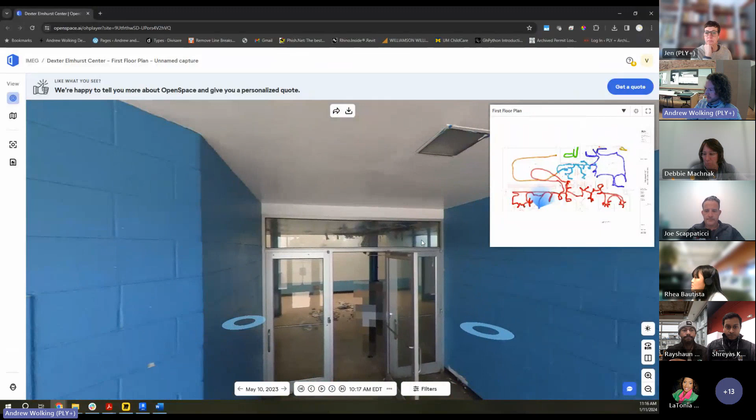If we move into the building, there's this entry space here, and then jumping into this main corridor. So we're looking now towards Tuxedo Street.

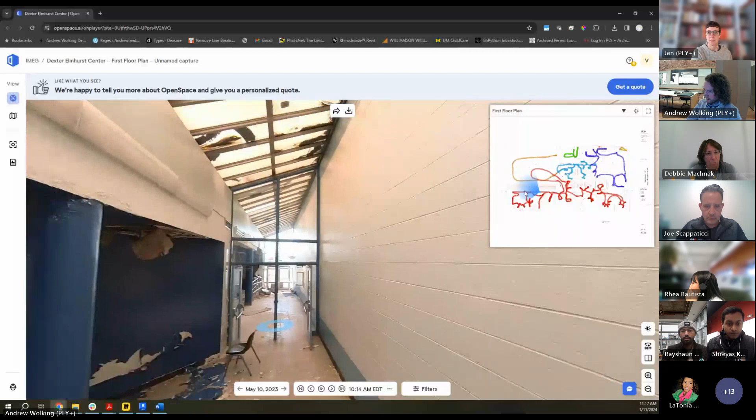There's this glass clerestory right now that's in pretty rough shape, with a lot of water damage from leaking over time.

This is that back admin space. There's a restroom located back here as well.

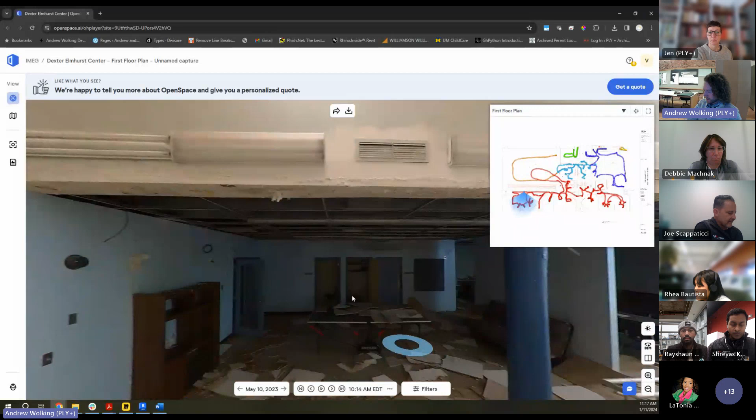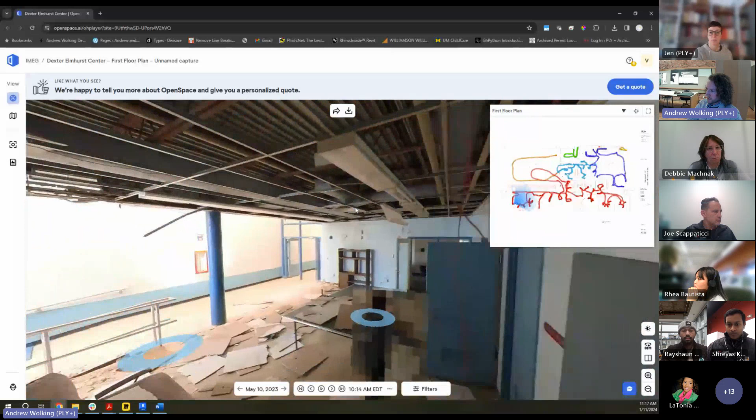A lot of the ceiling tiles have been removed up to this point, so we are able to see more of the existing structure than we currently can in this virtual walkthrough.

I'm going to jump back to the corridor here and work our way towards Elmhurst Street.

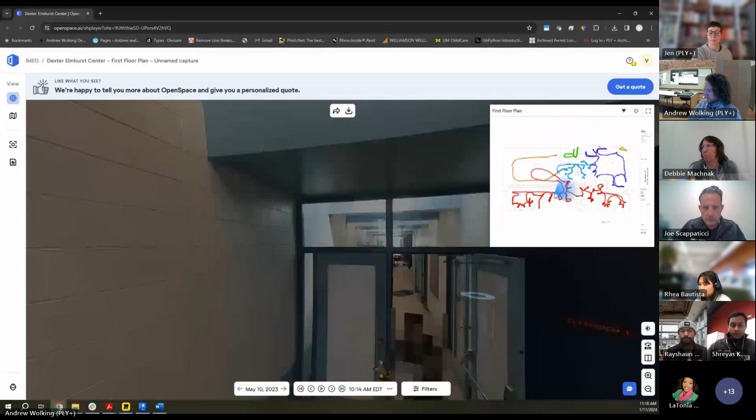These box outs are for the existing bar joists that span across the corridor.

I'm not going to go into these little side rooms here. There's really not much to see internally, and it's also quite dark on the inside there.

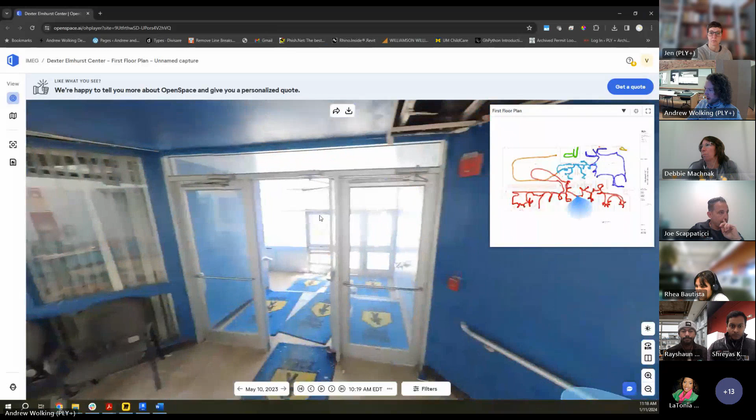So this is that second entrance off of Dexter. In our new plan, we're actually proposing to convert this into essentially a reading room and block this entrance off with a new storefront window.

There's 2 existing bathrooms right off of this main corridor here.

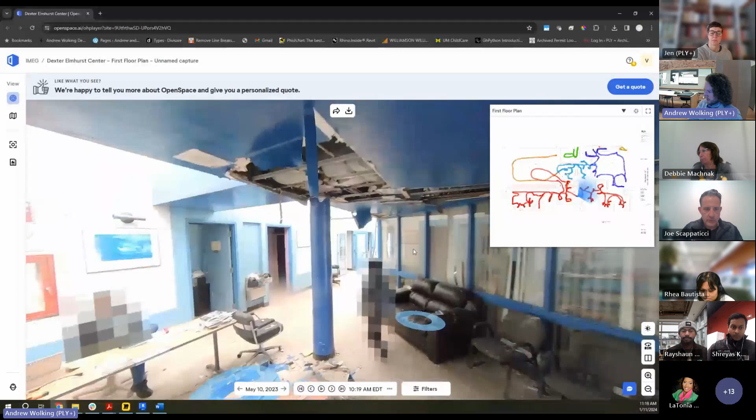Making our way towards Elmhurst Street, that other entranceway, you can see the water damage over time from the building.

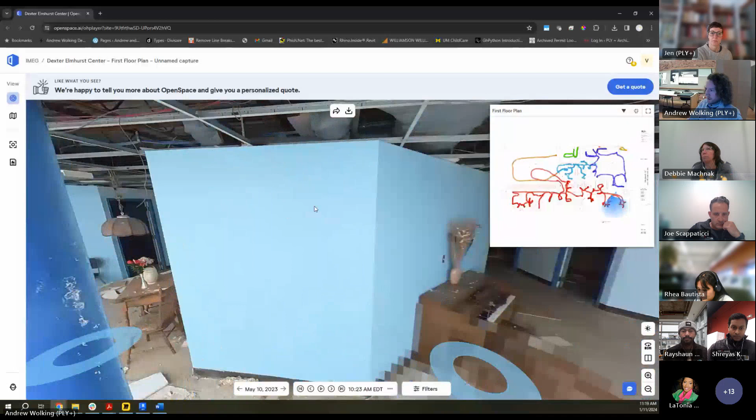Working my way into the community room here. Up in this little key plan, this purple area, it's a little dark in here. We didn't have power at the time, and there is no power at the building currently.

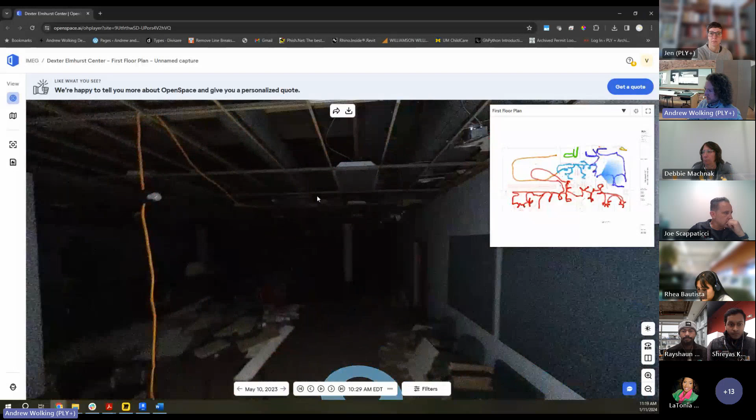Again, a lot of this ceiling grid has been removed. You can definitely access a little bit more of it right now if we were there, but this does give you an idea. There's an existing wood deck here.

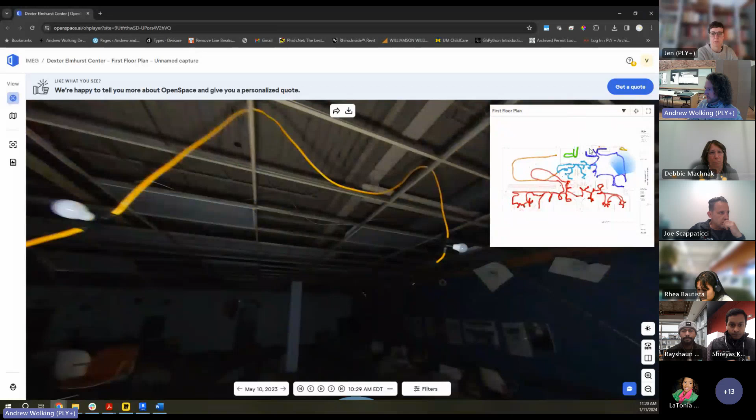This is currently an existing kitchen on the back side here, and then the fire suppression system has this corner room that's back in this yellow area here.

There's a central corridor that connects the community room to the gym. One of the driving factors for a lot of the renovation work is accessibility.

There's a lot of different levels within the building that we needed to navigate in order to simplify accessibility and access to the main restrooms in the center portion of the building, as well as that connection between the gym and the community room, which we'll take a look at when we look at the new floor plan.

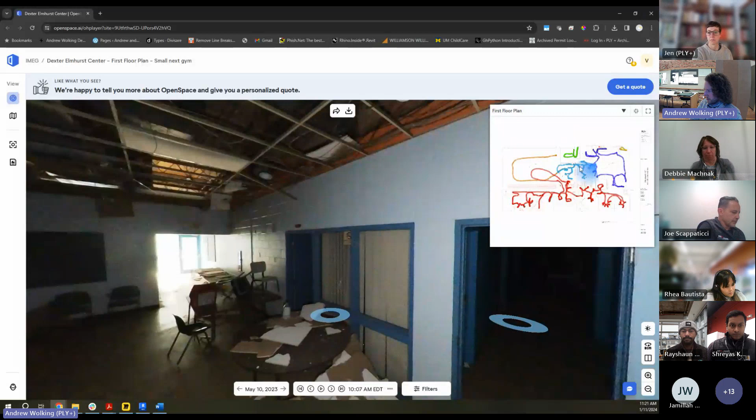This is a ramp that ascends up, levels out, and then goes back down to get to the gym.

Kind of be up in the ceiling space, bear with me here. And then we're going to make our way through to the gym.

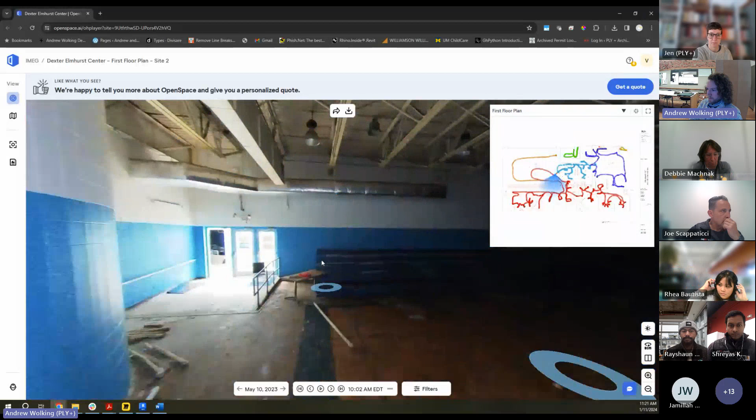It's a little bit dark here, so I might jump to some actual photos that we took early on. All the structure is in really good shape in the gym, it's more the finishes, etc., that need to be updated within this space here.

I'll jump to some existing photos of that gym when we did have power in the building, just to give you guys a better sense of what that space is like.

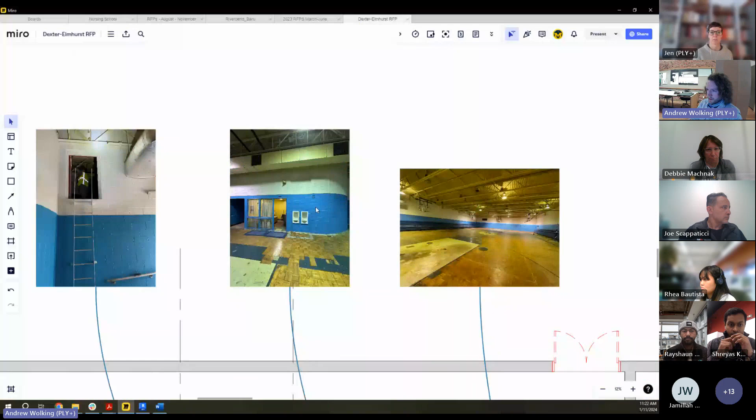This is looking towards another admin office. Off of that, there is an existing storage room, which if I go to the plan here, that's above the restrooms right now, that we are going to maintain.

We'll flip back to the virtual here.

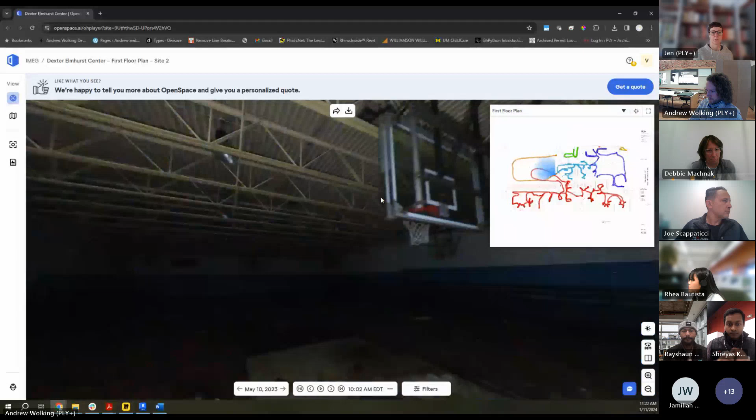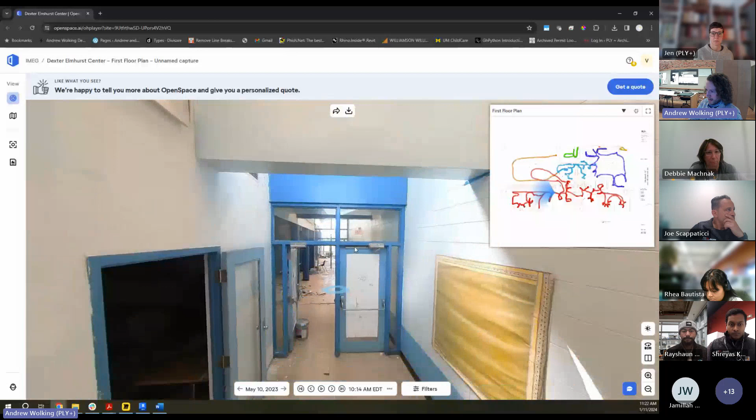And then jumping kind of back out. Whoops, there's the jump. Get back to the corridor here. So I feel like that gives you a sense of at least a little bit of where things are at right now with the existing conditions.

With that, I might jump to the main, new floor plan, and just walk through that real fast here.

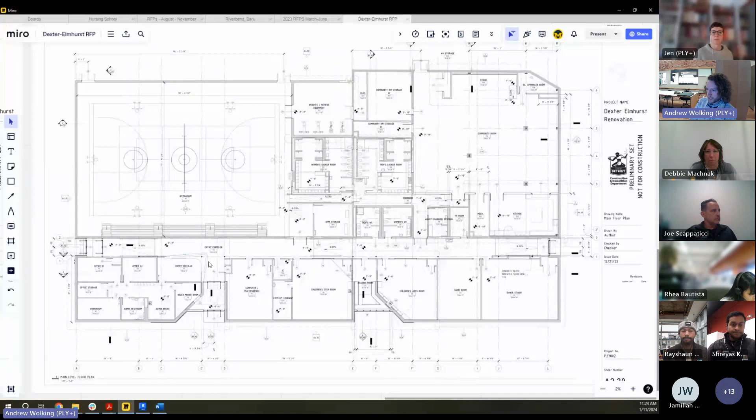In terms of circulation, we're going to come up a ramp. There's a main central check-in desk. Same thing off of Dexter. So anyone entering the building has to pass through this area first.

The exit off of Elmhurst is exactly that, it's going to be for egress only. And that goes the same for doors off of the gym back here, for egress, and then off of the community room as well. So the two main entrances, again, here and here for the main building.

That central portion of the building programmatically remains relatively the same. We're just reconfiguring the spaces so that we can have better access in terms of ADA accessibility and navigating those different floor levels.

So as you come up the main corridor here, you can tuck left to the gym, and there's a little ramp that takes you down because there is a floor level change between the gym and the main corridor.

Off of the gym here, we have an open weight room, and then an existing electrical room is going to remain just that, an electrical room, but with upgraded equipment as well.

That main connecting corridor that we had passing through this area, we're shifting plan south here, so there's a ramp that takes you up, and that allows a unification of this level to access the two locker rooms. This is labeled in the drawings as level 2 here.

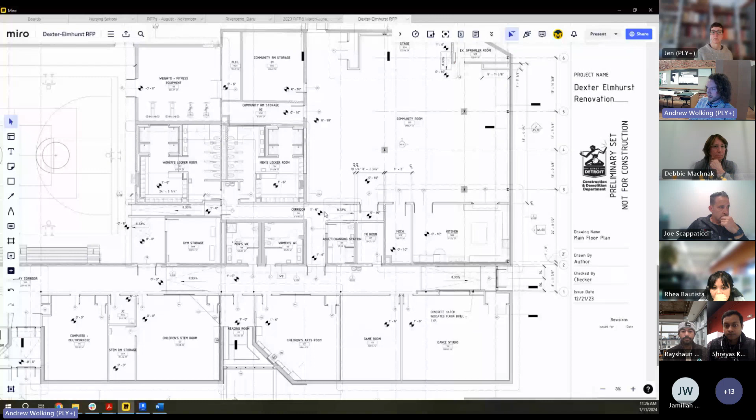To the right of that, we have an adult changing station, a larger room for accessibility, and then there's a level change again as we get into the community room, so another ramp that takes us down to this level here, and again, this was that existing building, along this grid line here.

Plan south, we've relocated that kitchen that was tucked along this back area. The rec center was interested in a larger kitchen, a community kitchen that allows the rec center to support community food programs, as well as maybe a teaching kitchen as well. So we enlarged that area, and that's right off of the community room as well.

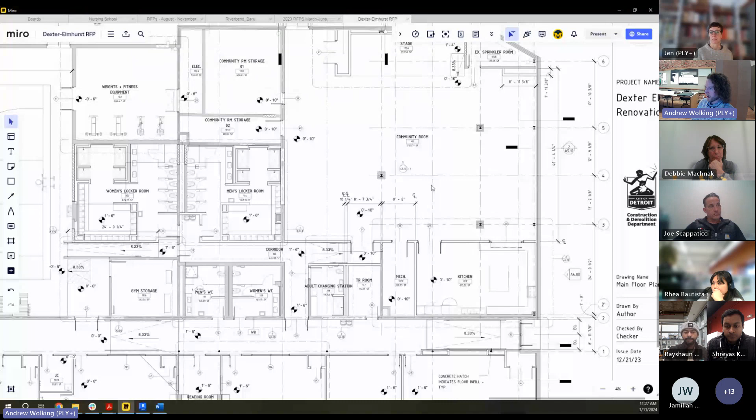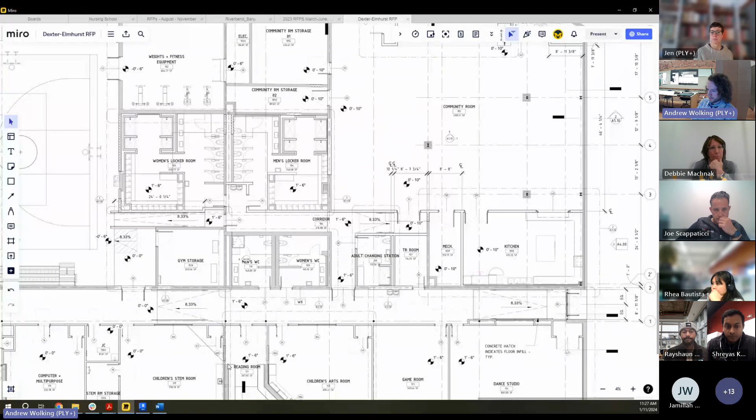And I think that covers everything from the main floor plan. In terms of the exterior of the building, we can go to a few photos of that on the outside.

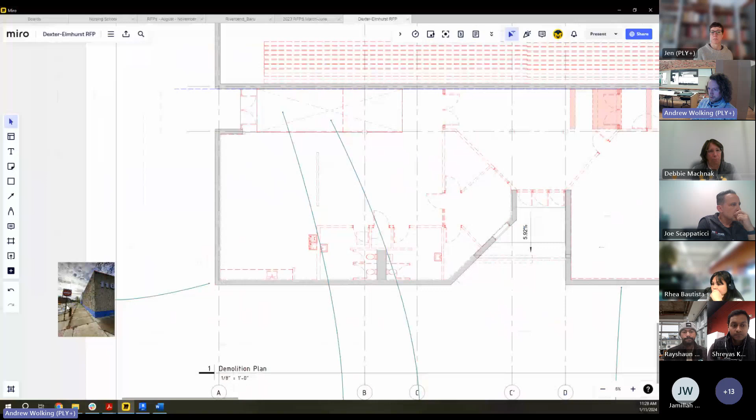We're updating finishes where we need to, but the exterior of the building is going to be essentially painted everywhere, and there are some areas that need masonry repair, as well as some tuck pointing, especially along this back wall off of the parking area, where this was the original building as well.

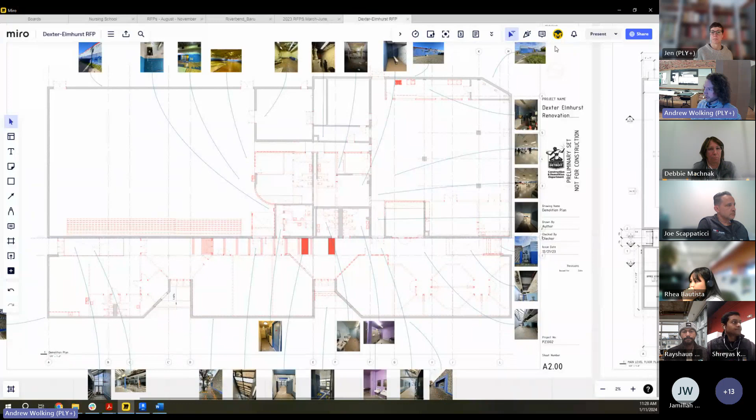So a couple of images of that. You can kind of see this has actually been removed. There was definitely some moisture issues on this wall, and a lot of the vegetation has been removed, but there's definitely some repair work needed along here.

This is kind of the dividing line between the existing building and the gym portion, which changes to CMU block on that side. We have a closer up view of that as well.

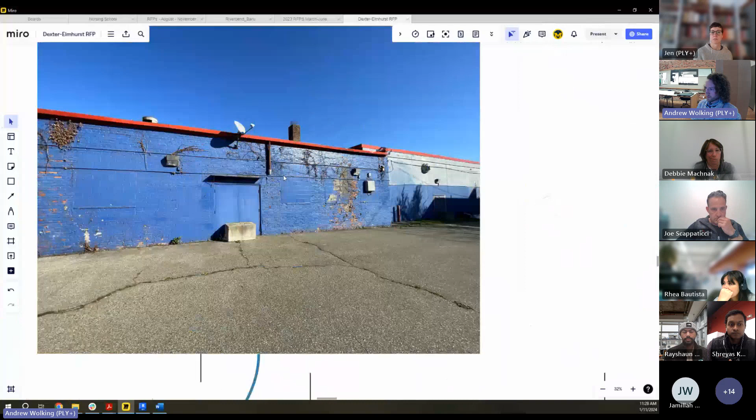And then in terms of the frontage off of Dexter Street, it's a fluted block construction, and then these little entryways that are tucked in here switch to just regular CMU.

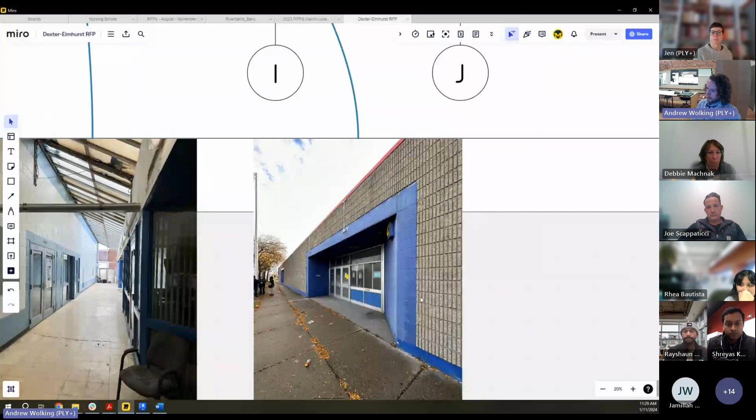We are proposing some new perforated metal screens to help us screen the RTU units that are going to be servicing the admin area, but also to give a little bit of identity to that frontage along Dexter Street, to bring the building some color as well as identity.

I think that covers it. Debbie, anything else I should touch on that I might have missed?

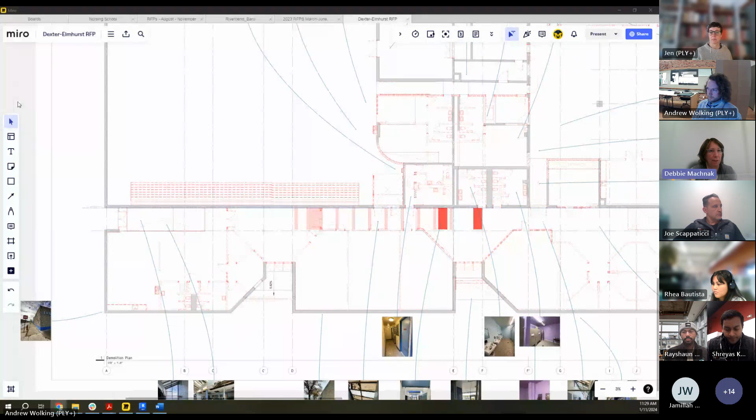No, I think you did pretty good with the inside of the building. I just want to make it very clear to everyone bidding on this: there's quite a bit of electrical work inside there, and there will be mechanical work for the rooftops. And one thing - there is some work in the basement, and it is showing on the demo plan, but that's part of the demolition, which is also part of this contract.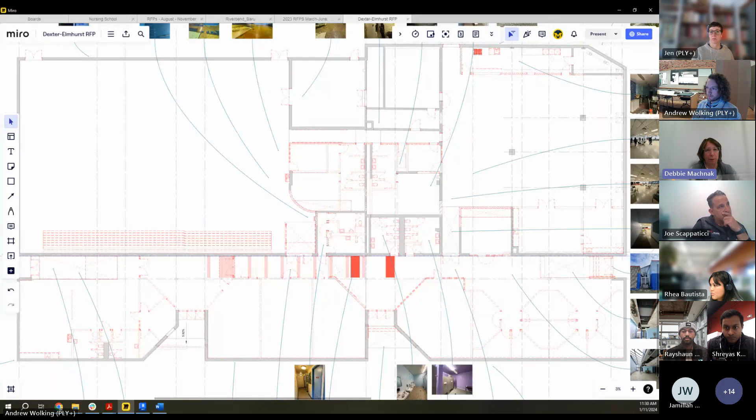So for that, thank you, Andrew. Again, I appreciate you running through that. The building is definitely - we're not walking it because there's been rain leaks and so forth in there. We do want to have the selective demo be part of the first process of the building, so it's something we'll be looking at with the bid and how I plan to get that work done.

That will take place. There will be no power to the building - there is currently no power. So you'll have to obtain and get some temporary power over to the building.

So, Rayshaun, would you like to show some of the park and the plaza area? Yes, okay, I want to share my screen. Can you guys see my screen? Or Deb, can you see my screen?

So a portion of this project will be the plaza and the park. So here we have the plaza, which will be a portion of Tuxedo closure, which is adjacent to the rec center that's going to be renovated, and then this larger parcel here, which will be the park.

So going back here to where the plaza will be, we're coordinating with Detroit Public Works to do the removal of Tuxedo, to bring it up to grade, and then we can start our construction for the plaza. So DPW will be coordinating that with us.

In regards to the park parcel, as you can see, the majority of the parcel is asphalt. I think it once was a parking lot, but you do have some amenities, which you can see here - there are some basketball courts here.

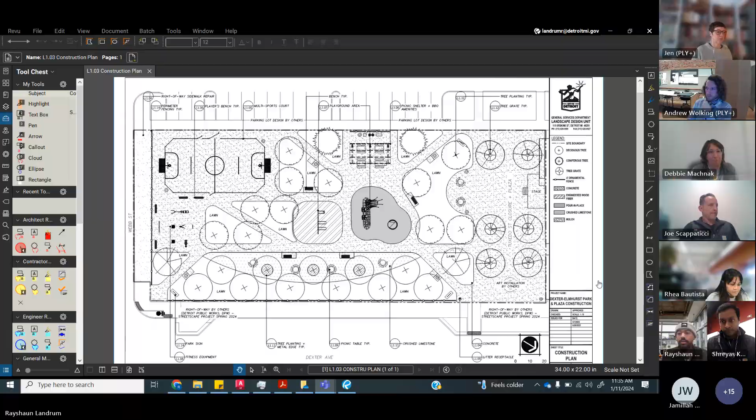Okay, can you guys see? Yeah, maybe—if you could zoom in a little bit to show behind the building.

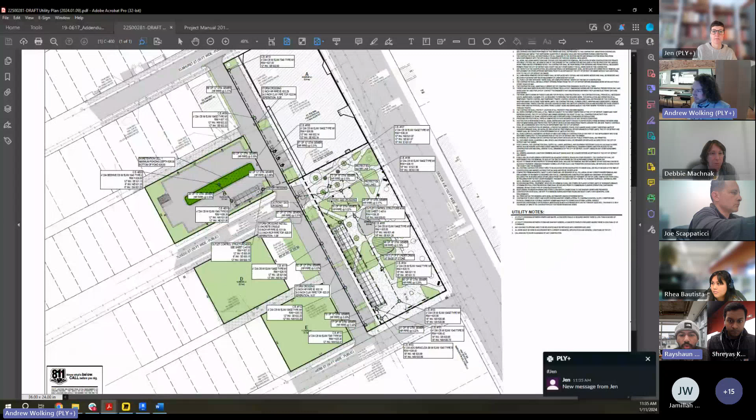There you go. I don't want to add—on this plan, the park and plaza new design is not reflected, but not too much has changed. If you look at the plaza, there are some green spaces being removed, but pretty much what I showed is reflected here.

Thank you for that. So I asked you to bring this up because the pricing schedule goes into areas A, B, C, and then D and E. A is the building portion, and we're hoping the contractors look at this so that we start the building first and then get into the site work after, because the building is ready to start and we'll be submitting for the permit on that.

Now the parking lot in the alley—we're expanding that parking lot, the alleyway will be expanded, and there's parking behind there as well. There's some stormwater work that's not complete. There will be a revised set of drawings coming out that will show the extent of that. However, for bidding purposes now, we want to let you know that is in there, and we have some cost estimates ourselves for that.

When you're putting your proposal together, what I'm asking is please ensure the building is put together with its own timeline and schedule, and then possibly have the exterior side of the project on a schedule that follows the building, or goes together with it, knowing that's our plan for any contractor out there.

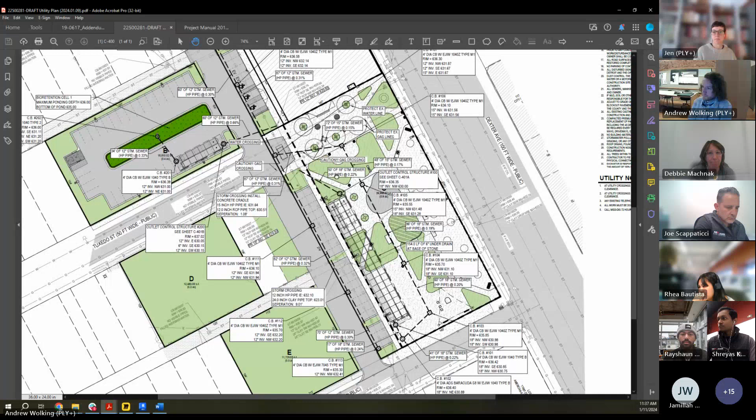Rhea, is there anything you'd like to add with that? No, I don't. I think with that, we could open up for a question and answer if anyone else doesn't have something to add to the design portion.